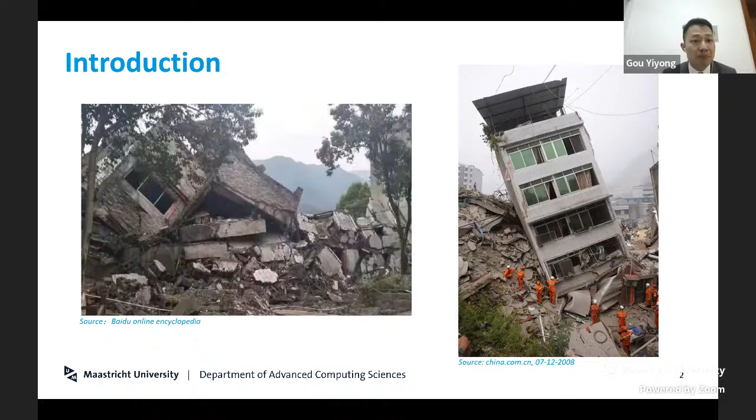Normally, after this kind of disaster, people will try to reach the disaster position and conduct rescue, such as manual checking or using a life detector. But in this case, the post-disaster environment is quite complex. It's really difficult for humans to enter a small-sized environment to conduct a rescue, or it's quite dangerous for rescue staff to enter this kind of environment, because a secondary disaster probably happens and it will cause more serious damage or life loss.

Moreover, after a disaster, some important infrastructure is probably damaged slightly, and in order to avoid more serious damage or secondary disaster, the repair work is important to save lives and reduce economic loss. But repairing may be difficult because the position to be repaired may be difficult for a person or ground-based repair machine to reach.

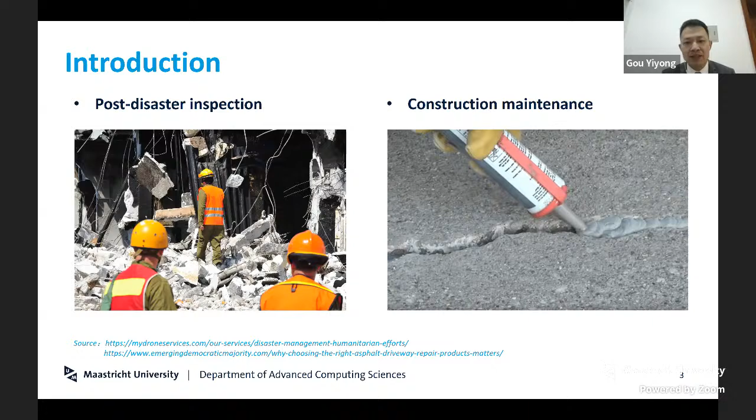To reduce the risk to lives and the economy, can we use aerial robots to conduct inspection, rescue, or repair work after a disaster? First, aerial robots can fly and avoid complex ground environments. Small-sized aerial robots can enter small-sized environments to conduct inspection. Aerial robots can bring tools to do repair or inspection, just like the group of aerial robots in this image. This image provides a vision for inspection and repair using aerial robots.

Several small-sized yellow aerial robots fly into a destroyed house to do inspection work in a compelling way. Because the post-disaster ground environment is not suitable for aerial robots landing, one large-sized blue aerial robot can provide a large platform to carry, release, and guide the small-sized aerial robot to enter the small-sized environment. One large-sized blue aerial robot with its manipulator is doing construction crack repair work.

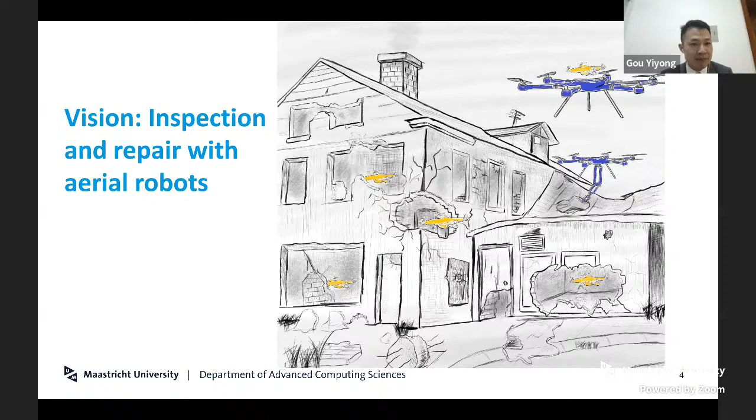In this way, aerial robots can help humans do some high-risk work to avoid the risk to lives and the economy in post-disaster rescue activities. This image description both inspired me to do research to provide proof of concept for post-disaster response activities using aerial robots. So it led to some research questions for me.

The first research question is about how to implement an aerial multi-environment cooperative system for the inspection of a dark hole. The purpose is to find a solution to inspect the small dark hole using aerial robots, and further prove the concept of post-disaster inspection using aerial robots.

To answer this question, it led to two sub-questions. The first one is how to achieve stable flight of an aerial carrier and its attached companion UAV. The second one is how to achieve aerial in-flight docking.

The second research question is about how to conduct construction crack autonomous repair using an aerial system. The purpose is to find a solution to repair construction cracks autonomously using an aerial system, to further prove the concept of post-disaster repair using aerial robots.

To answer these research questions, as shown on the left side, we explored a multi-environment cooperative inspection solution using two different sized aerial robots: an aerial carrier and a companion UAV, to inspect the dark hole. The first step is the carrier carries the companion UAV to the inspection area, then releases the companion UAV and guides it to the dark hole to inspect the inside. After its inspection work, it returns to the aerial carrier using the in-flight docking method.

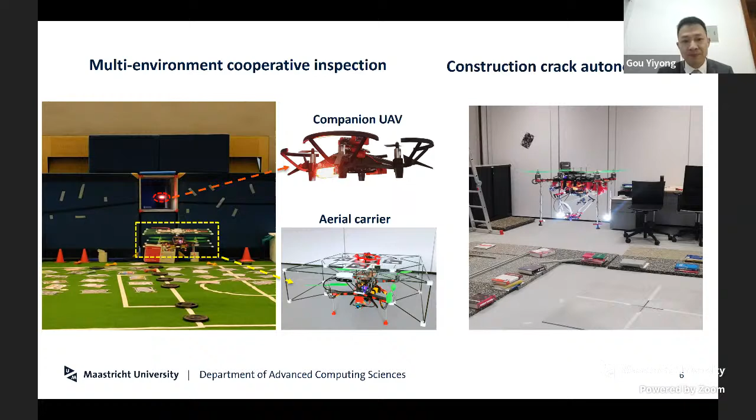In order to provide a stable platform for cooperative inspection, we need to design an aerial carrier and keep this aero carrier flight stable, especially during in-flight docking. We choose a cascaded flight control solution, a position control cascaded with a low-level attitude controller. In low-level control, we directly use the DJI-N3 autopilot. For the high-level control, we employed model predictive control.

As shown in the left side, we did a hover test in the lab, and the result is shown on the right side. The error is less than 9 centimeters in all directions. It indicates our aero carrier can hover stably to serve for in-flight docking.

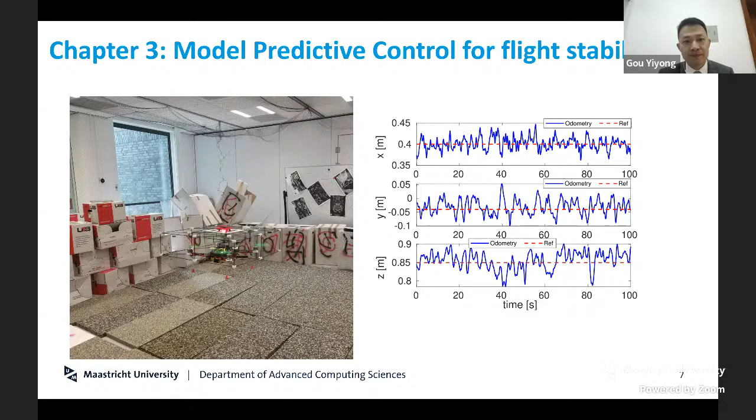When the aero carrier carries the companion UAV to a desired position or after in-flight docking, the aero carrier needs to anchor the companion UAV reliably. We design a docking platform including an aero anchor mechanism and a protection net to avoid destroying the companion UAV and aero carrier when docking fails.

As shown on the left side, we did the anchor test to check the locking successful range when the platform is shaking or wobbling. The marker in yellow was not anchored. More than 2 feet was grabbed to ensure locking on the aero carrier when it has large pitch and roll. To test the protection net's performance, the failure test was conducted, as shown in the bottom right.

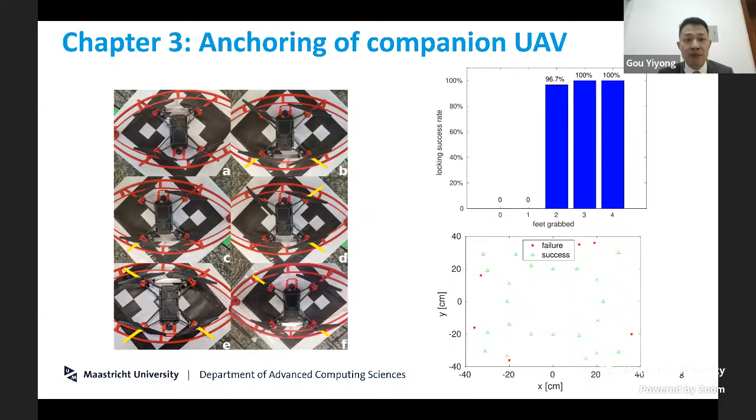The results indicate if the docking error is less than 35 centimeters, the aero carrier and the companion UAV will be protected. To prepare for in-flight docking, detection of the aero carrier is necessary.

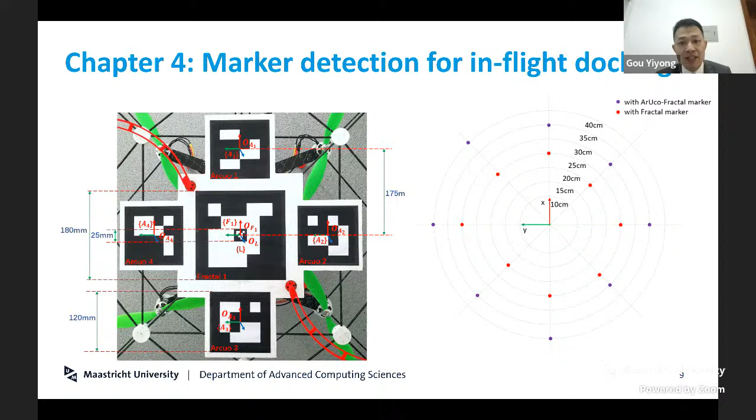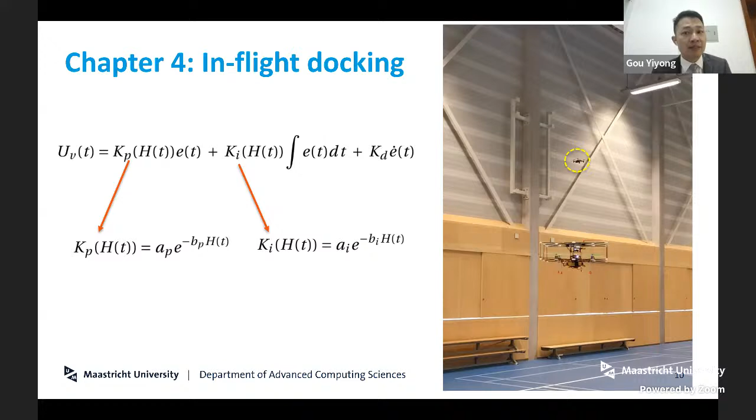When the companion UAV is close to the aerial carrier during in-flight docking, they will influence each other. For the small size companion UAV, we developed a height-dependent PID controller. In our experiments, as shown on the right side, it can dock and anchor safely. Even when the aerial carrier moves, the companion UAV can still follow its movement.

Before chapter 5, all the work is preparation work to answer the question of how to implement aerial multi-environment cooperative inspection. We need to fully implement multi-environment cooperative inspection to fully answer this question.

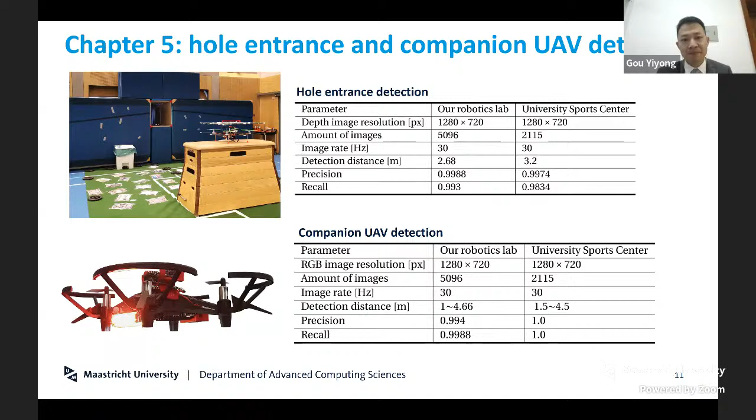Based on the preparation work in chapter 3 and 4, and the detection method of the companion UAV and hole of interest in this chapter, we conduct two main experiments: semi and full aerial cooperative inspection experiments. The difference between them is the in-flight docking.

Implementing both of them is not just combining simple methods together. They are system work to accomplish a specific task. We need to consider computing, communication, payload, energy, software tuning, and test environment setup.

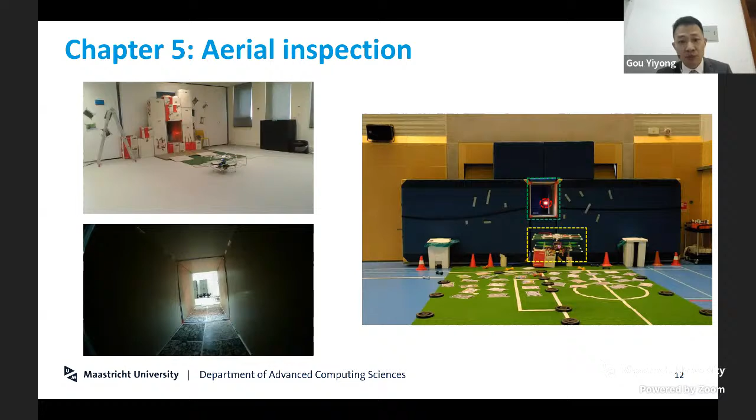To answer the second question, how to conduct construction crack autonomous repair using an aerial system, we reconfigured the aerial platform of the aerial carrier and combined a delta manipulator to build the aerial system for construction crack autonomous repair. We developed a delta manipulator including an extruder and an end effector with camera and ToF sensors.

The maximum average error in the X, Y, and Z directions is 2.38 centimeters.

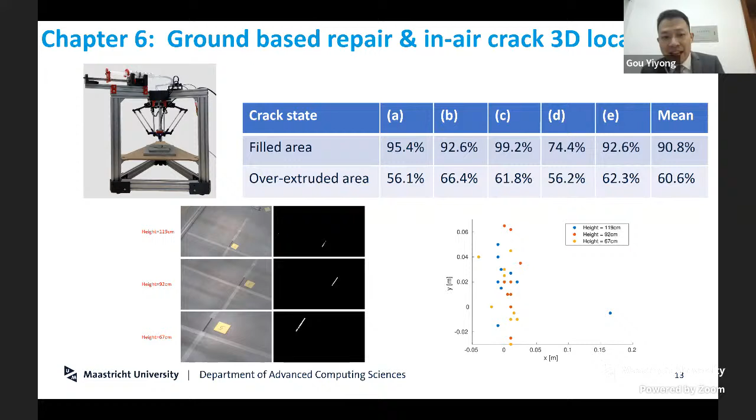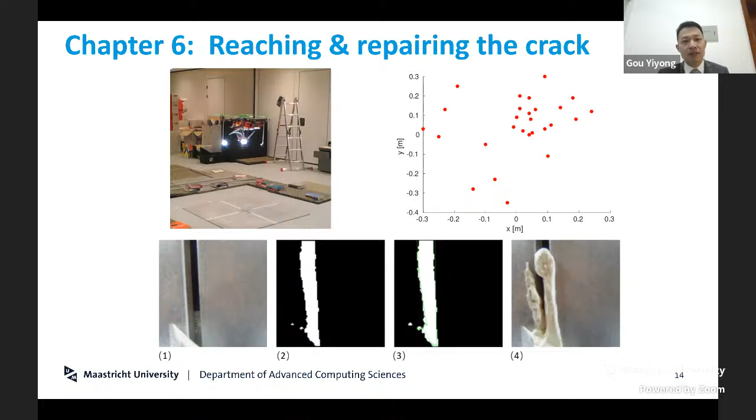To conclude, in chapter 3, we answered the question of how to achieve stable flight of an aerial carrier and its anchoring to a companion UAV, by doing the flight hover test and anchor test. In chapter 4, we did the in-flight docking related experiments to answer how to achieve aerial in-flight docking.

With these two sub-questions answered, we did the full aerial cooperative inspection in chapter 5 to answer the question of how to implement an aerial multi-environment cooperative inspection. Finally, in chapter 6, we conducted a crack repair full procedure experiment using the aerial system, answering the question of how to conduct construction crack autonomous repair using an aerial system.

To conclude this thesis, we developed two software architectures for multi-environment cooperative inspection and construction crack autonomous repair respectively. The control and localization methods of both cases are the same. We both select the same MPC control and optimization-based localization.

Our system architecture is not simply an integration of all the methods. It leads us to consider computing resource deployment, energy consumption, system basic requirements, and communication. The most challenging part is to build the test environment and tune the system, and finally finish the specific works in practice.

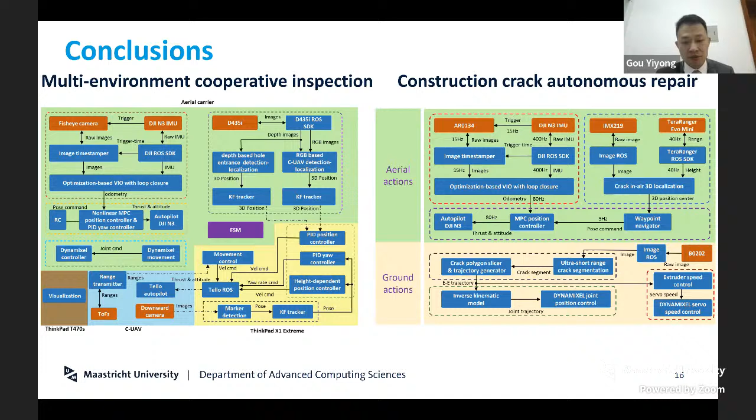In the end, I would like to thank my supervisor Dr. Rico Möckel, and Professor Gerhard Weiss, and all my supporters for your care in my PhD life. Thanks for listening. I'll give the words back to you, Prorector.